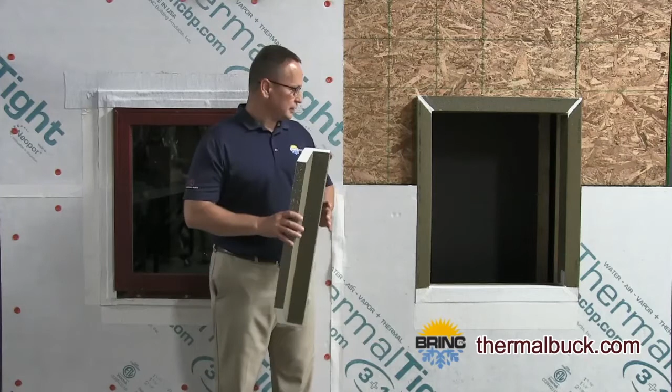The first product I'd like to talk to you about today is Thermal Buck. Thermal Buck is a mounting system for windows and doors when you use continuous insulation. Thermal Buck moves that mounting point away from your wall, so you have a flush plane to attach your cladding. Thermal Buck comes in 7 different sizes to match what you're doing on the outside of your wall. The different thicknesses of insulation, whether you're going to use a rain screen, whatever you're after, we have the solution for what you need to do.

Thermal Buck simplifies this process. Typically a wood buck is used, and there's a lot of inefficiencies with a wood buck. A wood buck has thermal bridging, it's very hard to seal out moisture and water, and Thermal Buck does a great job of solving all of these issues.

Thermal Buck also has an integral slope to it. It starts at 1 3/4 inches and goes to the outside edge. All the pieces have it so that your entire new rough opening is waterproof and made to drain to the outside. When you install your windows, you seal the back side of that for your water and air seal. Then anytime that window could possibly leak, it runs down the cavity and out to the outer face of your water barrier.

Now that we've talked about Thermal Buck and how it will work with any type of continuous insulation, I'd like to talk to you about Thermal Tight, which is our panel system that we designed to manage the four control layers of your wall system, which are bulk water, air infiltration, thermal performance, and vapor drive.

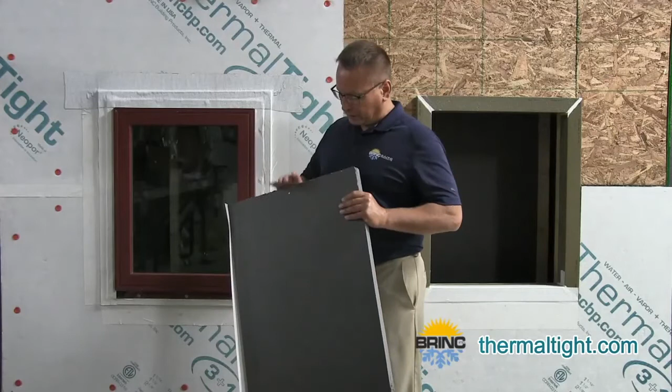So what we started out with is an insulation called Neopor. It's a graphite-enhanced EPS by BASF, with an R-4.7 per inch at 75 degrees. That's a stable R-value because it doesn't use any blowing agents—it uses graphite to enhance that R-value, and that R-value actually increases as temperatures decrease.

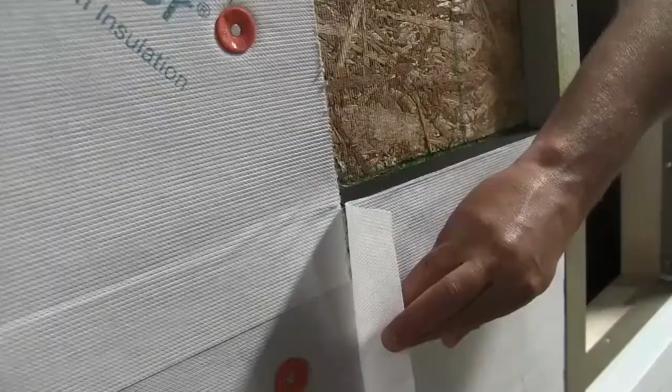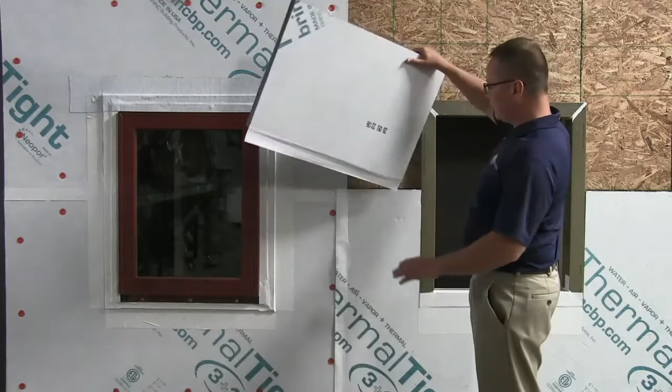We laminate a high-performance weather-resistant barrier to the base Neopor panel. The WRB is larger than the panel below it, creating a flap system. The reason for that flap system is to tie the whole wall system together so you can manage your bulk water and air on the outside surface. We adhere these flaps with double-sided tape. You first do a sideways flap, then when you come back with your next row, you have a top-over-bottom flap, so any water coming down your wall never has a reverse flap to get into the wall system. Once everything is sealed up, we install the windows and flash them with our own tapes, so you have one supplier to give you all the answers for your exterior wall system.

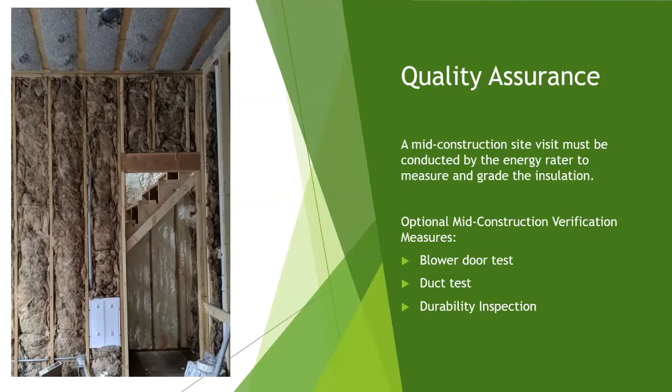There's also optional testing that can be done: mid-construction blower door, mid-construction duct test, which we really do recommend because it gives you an understanding of how the home is performing and the air sealing measures you're doing. You can see how that is stacking up at an early stage and address issues early on, prior to drywall being installed. So talk to your rater and your project team about getting that done. That is a definite helpful test to have completed.

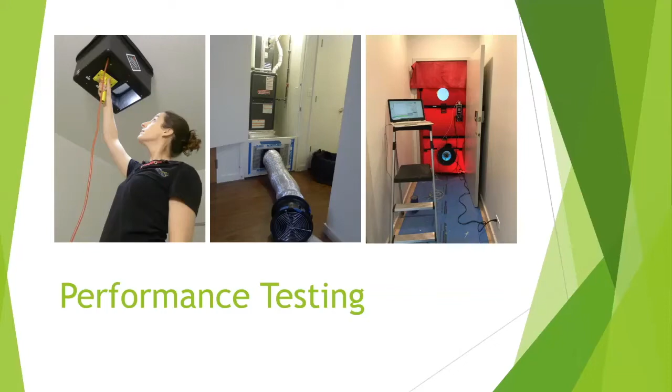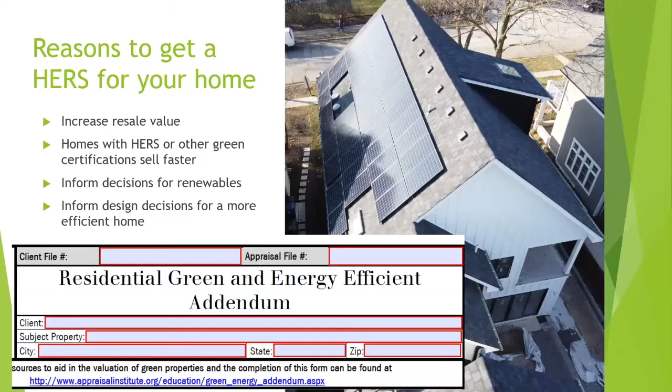It's a great way to measure and assess the performance, and it allows you to make decisions for renewables if you're sizing systems, and it really helps out with the real estate aspect. So that's the HERS idea in a nutshell, and we're going to find out from all of the members today what their HERS score was. So now you have a better understanding, and Katie, I'll give it to you.

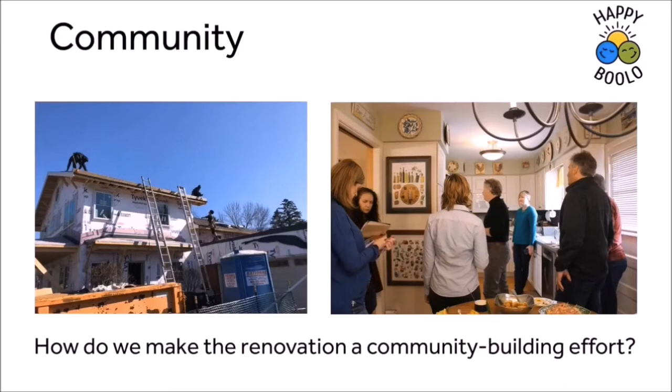Here we're pursuing three opportunities related to community. The first: how do we create a living space that really works to bring people together and operates as a cozy retreat for the two of us? Secondly, how do we challenge this stereotypical experience that house project equals headache, and instead have the process build community? Third, how do we renovate the home to fit into our Drury Lane neighborhood?

Once we decided to stay, functionality had to become the next pillar of our philosophy. Here we're dealing with a 1964 rather constrained split-level floor plan, the type you find all over the Chicagoland area and in many other U.S. suburban areas. So the question is, how do we transform this into a renovated structure that supports living what we love and fosters healthy habits? For us, functionality includes principles such as design for ease of movement and built-in resiliency.

Our third pillar, sustainability. We had already invested so much in our landscape over the years, migrating from more conventional beds to natural gardening practices grounded in the field of permaculture. So here we ask, how can we extend what we're already doing to the full footprint of the home and further enhance our outdoor practices? We are very grateful to be on track to be the first LEED home in Arlington Heights, and one of just a few LEED Platinum remodeled homes in the Chicago area.

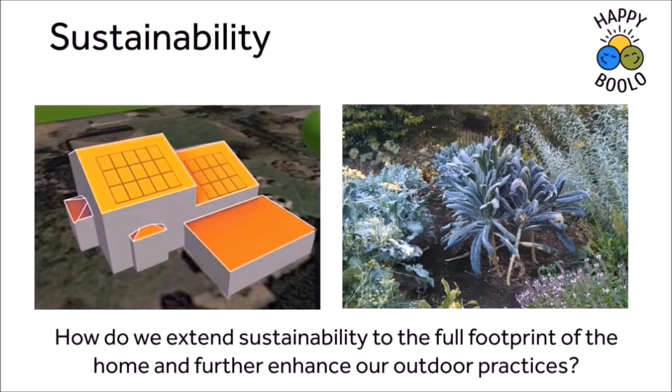We are thrilled to have such a wonderful community of experts working on the project, some of whom will walk you through how we are bringing our philosophy to life in our Happy Boolo home. I'm pleased to turn it over to Mike Coleman, our architect general contractor, the man of many hats on this project.

I'm Mike Coleman. I'm a licensed architect and owner of Smart House, a design-build company specializing in high-performance, sustainable, healthy homes. I'd like to share with you a project that we've been working on for the last year or so, affectionately called Happy Boolo. The challenge was to take a typical 1960s split-level suburban house and convert it into a LEED Platinum and net zero energy home.

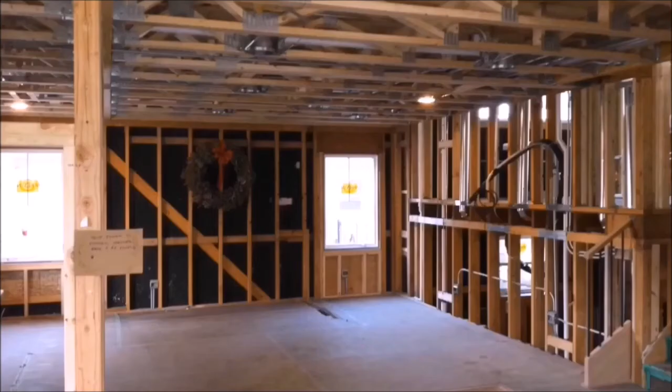How do we do it? Our approach was to try and reuse as much of the existing home as we could and design something complementary to the neighborhood, and do that all based on using the best science and technology available today.

Mike and Amy were very interested to try and capture as much energy and water on site to be used to power their home, as well as provide food source via site-harvested food. The site and orientation of the home provided opportunities to take advantage of solar energy in a number of ways. Here's Lisa Albrecht to talk a little bit more about the solar system design.

My name is Lisa Albrecht and I own Albrecht Solar. I've been in the solar industry here in Illinois since 2007, and I also serve on the board of directors for the Illinois Solar Energy Association. The project is going to have 27 solar panels, which should provide about 110% of their annual load pre-construction. Because Mike and Amy had already lived in this house, we knew what their electric usage was in the past.

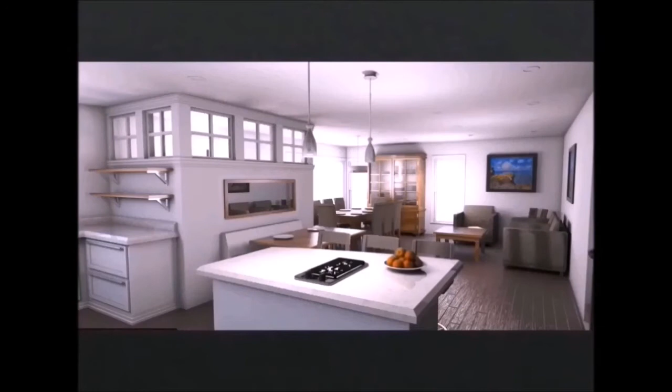One of the main drivers for this project was a desire to increase the functionality of the home in a number of areas. First, Mike and Amy wanted to make it even easier and more inviting to share moments of breaking bread. For this, the focus was on expanding the kitchen and providing flexibility to allow for various size gatherings.

One of the features we incorporated into the design is this light shaft thermal chimney. With a skylight located on the roof, light filters down through the main stairway in the house all the way down to the lower level. The skylight can be opened, allowing natural ventilation to be drawn up through the cooler air in the lower level.

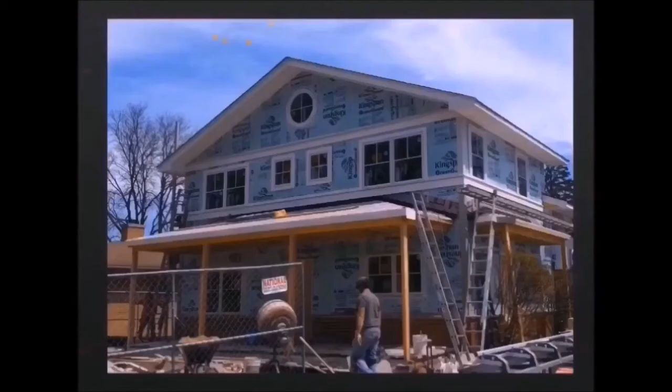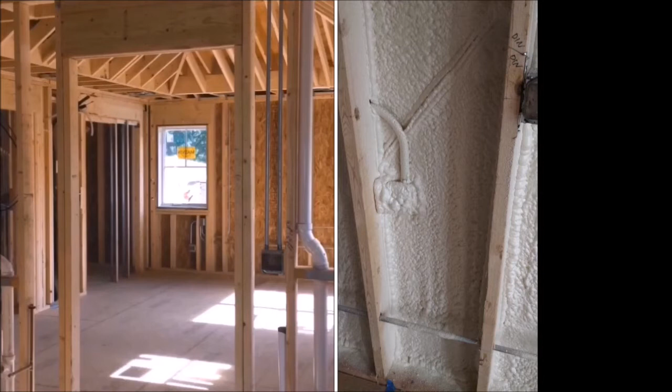The entire exterior of the home was wrapped in 1.5 inches of rigid insulation. The existing interior walls were salvaged and reused as much as possible. The exterior walls were sprayed with 1 inch of closed cell foam as an air sealer. Batts were applied over that, then drywall. The roof and attic space were insulated to R65 with a combination of batt and blow-in insulation, and the walls achieved about an R34. The exterior of the home is designed to respect the scale and character of the original architecture.

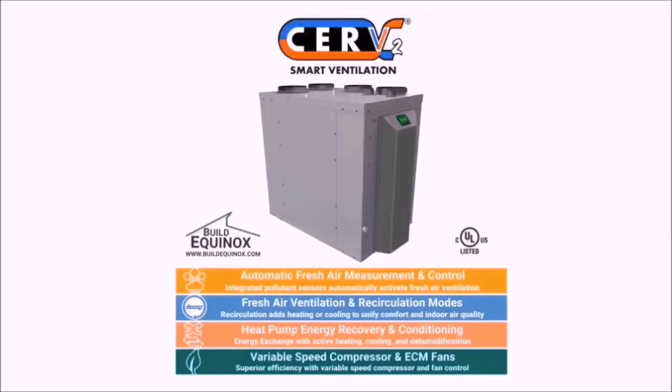To optimize indoor air quality and comfort, we chose a conditioned energy recovery ventilation system, or CERV.

Hello, I'm Ben Newell, president of Build Equinox. Welcome to our net zero facility located in Urbana, Illinois. This is where we design and manufacture the CERV smart ventilation system.

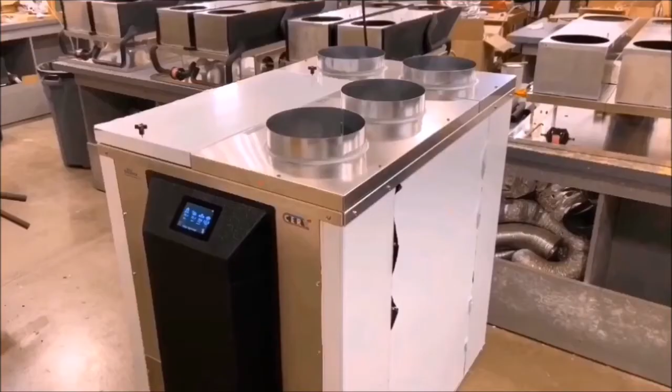Unlike traditional ERVs, the CERV uses a small heat pump for energy recovery. This allows us to actively heat or cool and dehumidify the fresh air as it's brought into the house. The CERV is a smart system because it uses actual air quality data to make decisions on ventilating the home. It measures indoor and outdoor temperature and relative humidity levels, along with indoor CO2 and VOC levels. This ensures excellent air quality and saves a lot of energy.

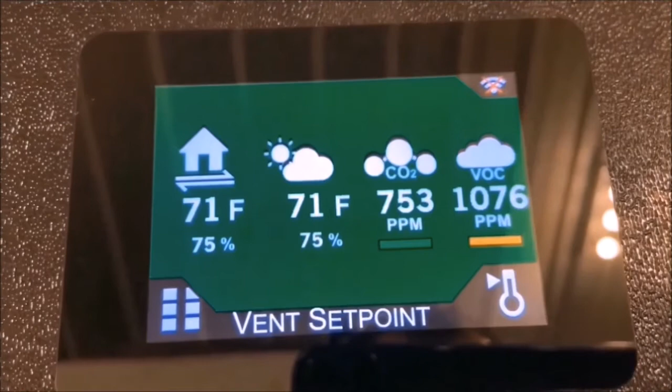Coupled with the CERV, we are utilizing Mitsubishi electric mini split heat pumps located strategically throughout the home. The mini split heat pumps provide the heating and cooling energy. The CERV distributes the air evenly throughout the home, and the whole system working together is a very energy efficient electric solution to all the heating and cooling needs of the home.

Selecting sustainable and energy efficient fixtures and finishes is also a priority.

Here's Carrie to talk a little bit about the interior design process. Hi, I'm Carrie, design coordinator at Giuliano Design. Together with principal and owner Julie, we are designing and curating the Happy Boolo interior spaces.

Interior design is more than beautiful fabrics and fixtures. A truly well-designed space functionally supports the behavioral habits of the homeowner. An added and unique aspect of the Happy Boolo design process has been the careful and deliberate consideration around the sustainability of the products and materials selected to complete the needed functionality and the desired aesthetic.

Thanks, Carrie. Now here's Mike Baker to take us a little bit deeper into the landscape design. Thanks, Mike. Amy and I are really excited about our landscape vision because it was the catalyst that inspired the whole project from the start, and has actually evolved to manifest all three facets of our philosophy.

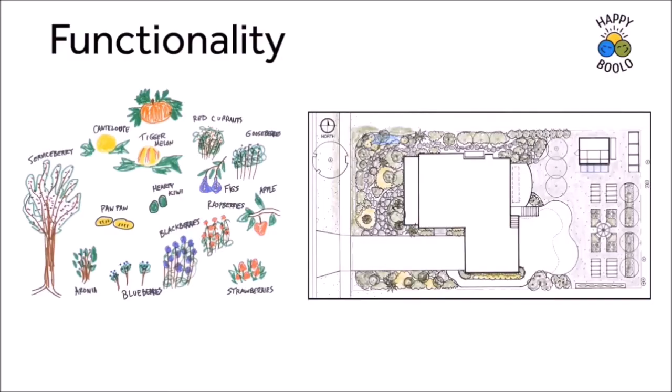Our landscape will work for us in that it's predominantly edible, and we will be expanding the diversity of herbs, vegetables, and fruits we have historically grown by adding select nut-bearing trees. The plants we choose will also be functional, whether that's comfrey used for chop and drop fertilizer or willow and hazel used for building raised bed fencing, compost bins, and plant supports.

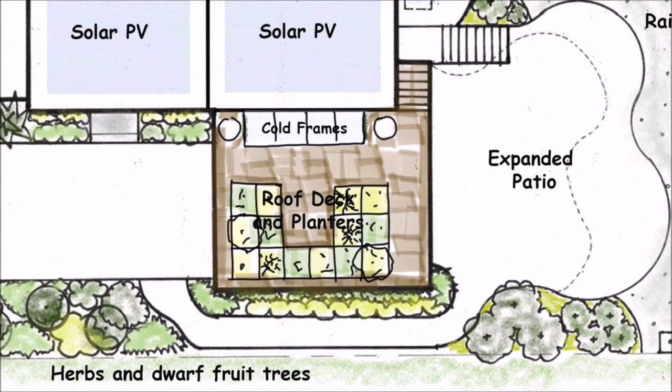Our garage wall will provide a sunny microclimate for herbs and espaliered fruit trees, while the sun-drenched garage roof will protect other plants from rabbits. Our cold frames, raised beds, and greenhouse will extend our growing season, while the vertical structures we use in the beds and elsewhere will optimize our limited horizontal space.

The architecture of the house itself will provide the function of capturing rainwater from the roof and garage terrace and then directing it to catchment areas in different parts of the landscape.

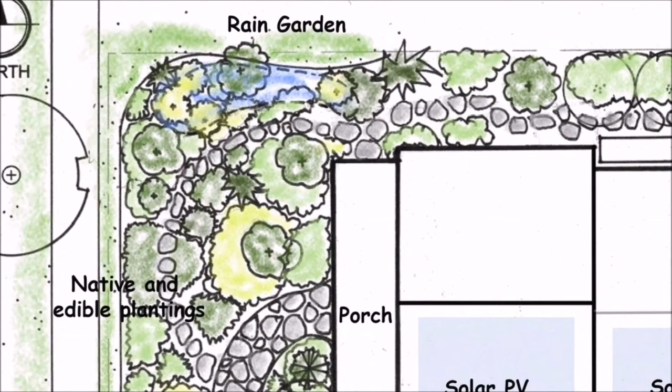It's also important to us that any landscape be pleasing to the eye, so the plants, shrubs, and trees we choose will also provide aesthetic appeal, while their supporting structural elements will keep the landscape tidy and organized. And we also look forward to sharing our landscape's productivity with our community. We hope our landscape can be a living classroom to show what a regenerative outdoor environment looks like, along with the techniques that allow you to create such a beautiful and productive retreat.

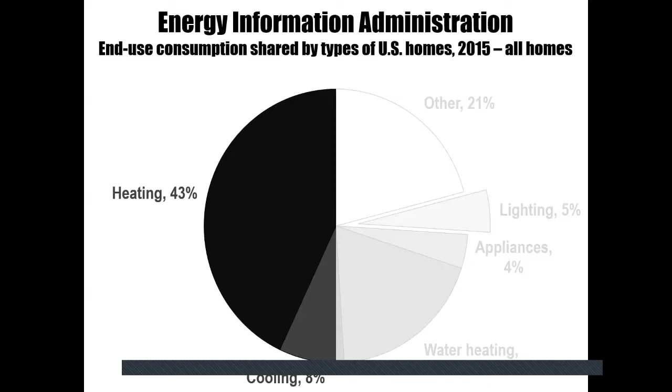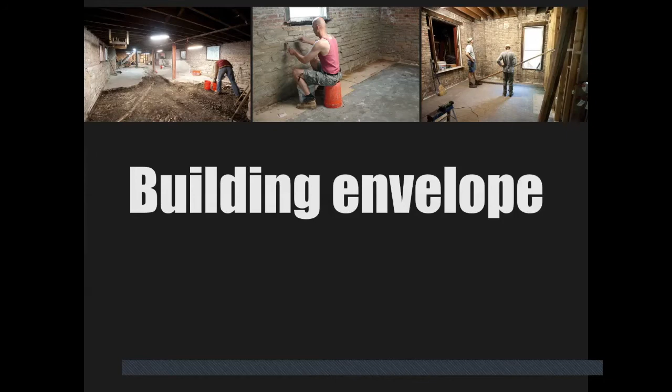To make a significant dent in space conditioning, we need to improve the entire building envelope, which includes several aspects, such as the building slab, the foundation wall, the exterior walls, doors and windows, all sorts of other holes in the walls, the attic, and the roof, of course. The improvements to the building envelope we are talking about are basically insulation and air sealing. In other words, thermal improvements to the building envelope and eliminating air drafts, which also will make for a much more comfortable home.

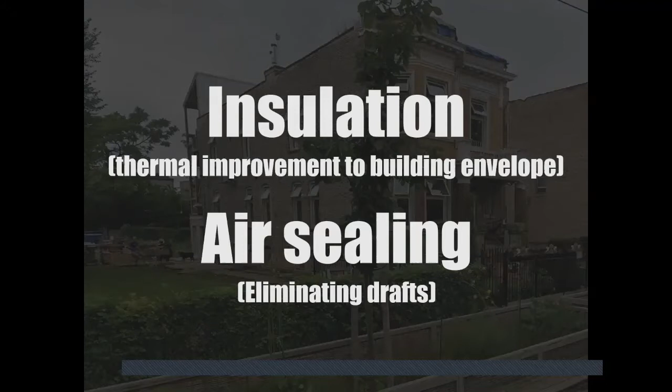Let me give you a baseline from the early days of our project. One easily quantifiable metric of building is air tightness, thanks to the blower door test that Lindsay mentioned at the beginning of this webinar. The blower door test at the beginning of our project yielded almost 5,000 cubic feet per minute at 50 Pascal depressurization of the home.

With the help of Timothy Hepner, we figured out that the cumulative area of air leaks would add up to a hole in the wall, or an open window, measuring 22 by 22 inches. And that window is open year round, no matter how hot or cold. So think about the polar vortex - you're trying to keep your house warm, but you have that window you can't close. That's sort of what was going on there.

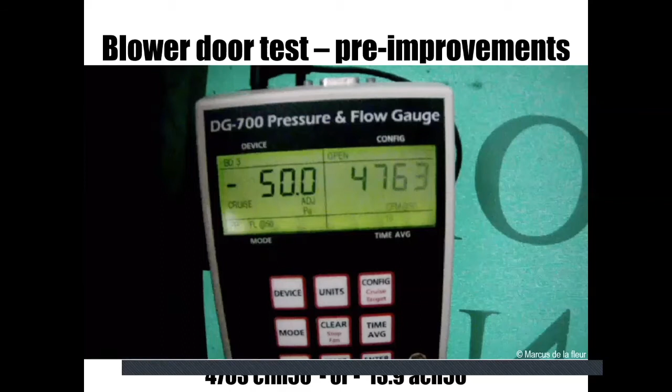Let me ignore for a moment all the deferred maintenance items on our 100-plus-year-old home that we had to uncover and fix. In order to tighten up and insulate the building envelope, we had to find all real and potential air leaks.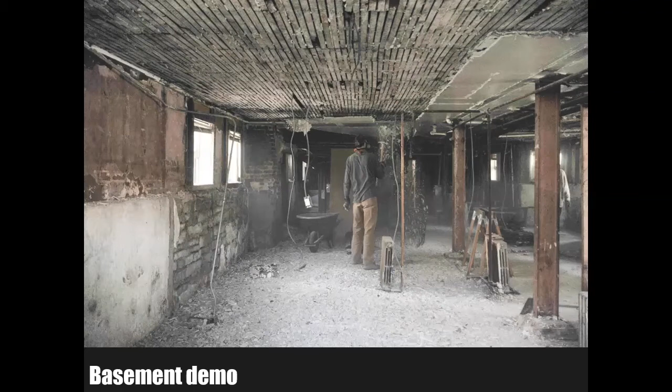Which basically means cutting the building down to the masonry walls and studs and starting over. In that process, we salvaged as much material as possible. We had a construction waste management plan, and what we couldn't salvage was sorted for recycling, which left us only with a small amount of debris that went to the landfill, such as the old plaster.

Back to the building envelope improvements, we used what's called a flash and batt strategy tailored to our building. We started off with an uninterrupted layer of closed-cell foam across all exterior walls for air sealing, followed by a layer of open cell foam and rock wool, which yielded an insulation value, or R value, between 28 and 40.

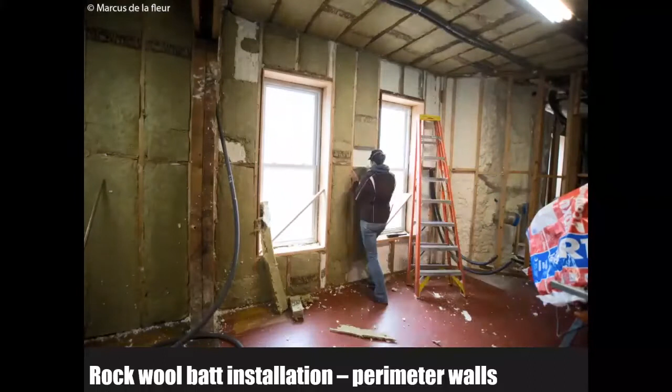I highly recommend tailoring any air sealing and insulation strategies to the specifics of your building and your energy goals, as every building is really different, in particular existing and older buildings.

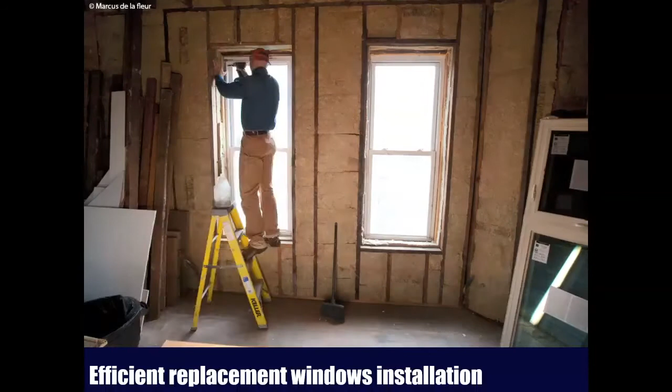Now that takes care of the walls, except that we still have those pesky holes that are left. Some people call them windows. This is a tricky subject, as it is hard to make money back on expensive and high-performing windows.

Here are a couple of aspects that I can share. Whatever window you pick, it should somewhat correspond to your insulation assembly. In other words, there's no point having really good insulated walls and then lousy windows, or the other way around - really high-performing windows but insulation in your walls that could really be better.

In this day and age, there's really no reason to pick a window that has a U factor greater than 0.2. These well-insulated windows are now widely available for a very reasonable price.

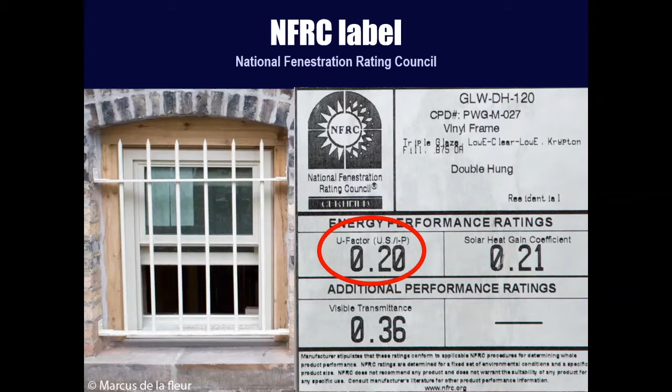Also, the more moving parts on the window, the greater the potential for air leakage, which brings me to this blank field on this NFRC label. What should be listed here is the air leakage for this window. If it isn't listed, make sure to ask what the air leakage rating is.

Even though Energy Star requires an air leakage value of equal or less than 0.3 cubic feet per minute per square foot area of window, that 0.3 value would be a rather drafty and uncomfortable window. So I definitely recommend that for a comfortable, somewhat airtight window, one would need to drop that value by an order of magnitude to something closer to 0.03.

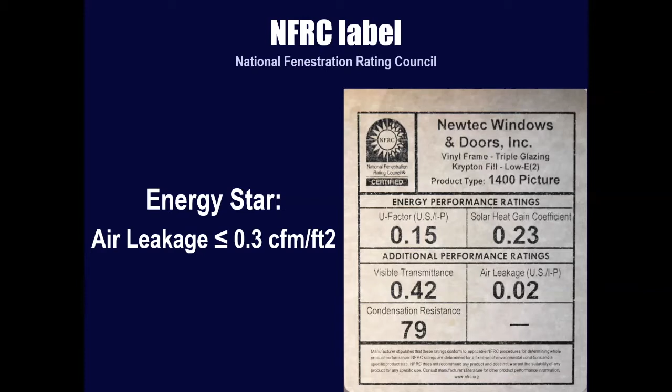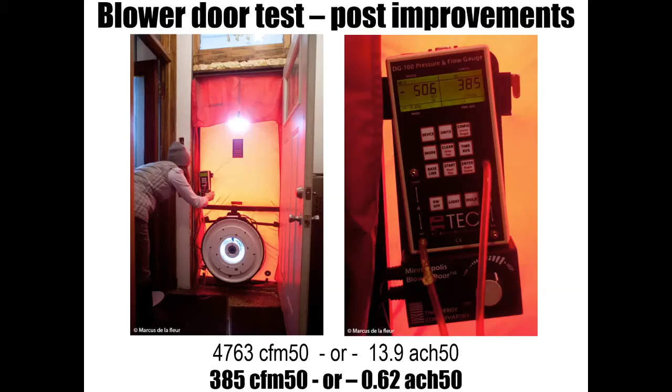Now that we have tightened up the building envelope, it's time to get the blower test running again, and our results dropped from the previous 5,000 cubic feet per minute at 50 Pascal down to 400 cubic feet per minute. Or, using the hole in the wall analogy again, we went from a 22 by 22 inch hole in the wall down to a 6.5 by 6.5 inch hole in the wall. Now that is one big problem solved.

Problem is, another one is created. With natural ventilation basically eliminated and no longer flushing out pollutants, we now have to address indoor air quality - in other words, how to prevent the indoors from feeling smelly and stale after a few hours or days.

And depending on what you feed these guys, it can get smelly within minutes. Maybe that's TMI.

However, moving on, to provide healthy and energy efficient levels of fresh air supply, we employed an ERV for each unit in the building, which is basically a ventilation unit with a built-in heat exchanger.

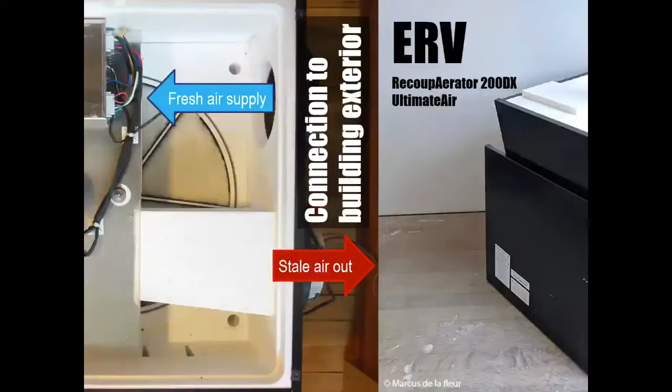The ERV has one side that connects to the exterior of the building, and if we flip it around to the other side, we see the side that connects to the interior of the building. In between, we have an enthalpy wheel that sits between the two sides, which you can see partially in the background. That enthalpy wheel transfers sensible and latent energy between the air streams - in other words, it transfers thermal energy and moisture content.

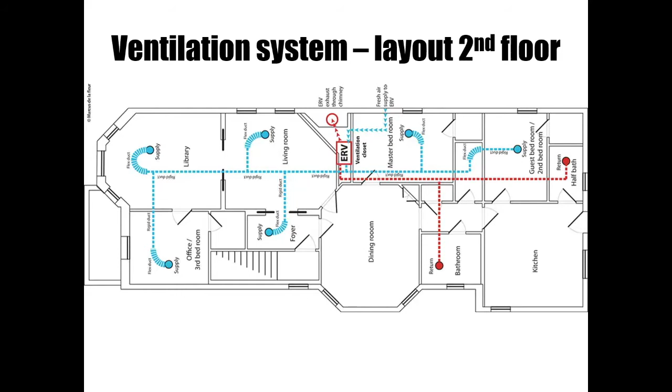I have to say, I really love this gadget. I love the ERV, particularly in the wintertime. It's like having a window open all the time to get fresh air in, but it doesn't get cold. I absolutely love it.

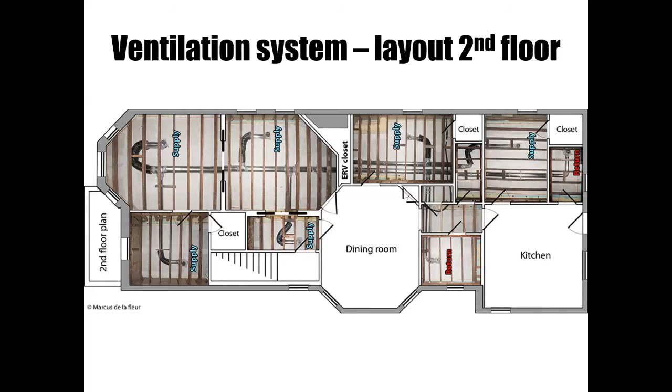With the peak heating load on our project estimated and reduced, including domestic hot water, reduced to 37,500 BTU, we were able to install a small hydronic heating system with an indirect fired domestic hot water storage tank.

The air tightness in combination with the insulation strategy does show in the energy consumption when we look at the space heating, where we recorded an 80% reduction in 2016.

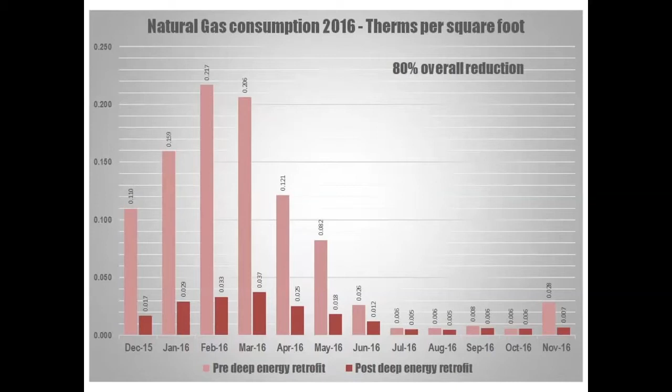Since then, this primary heating system has been demoted to a backup heating system with the installation of our all-electric mini splits or air source heat pumps, which provide us with the needed winter heating and summer cooling and dehumidification.

With a significant reduction in the overall electricity demand, we were able to add a grid-tied photovoltaic system, or photovoltaic array, also by Lisa Albrecht, that basically powers all our electrical needs, including the mini splits, including the heating and cooling.

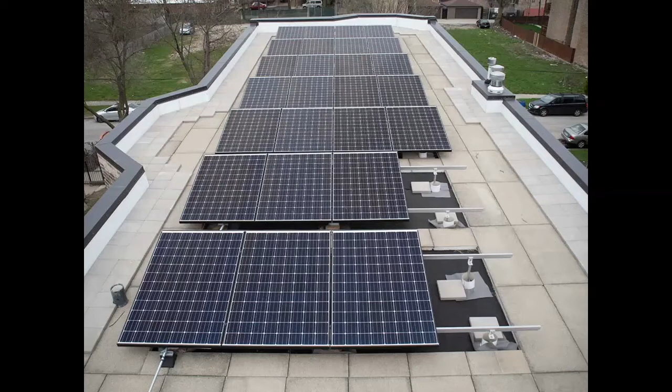This last step was the one that puts net zero energy within our reach. But what we have to remember is it only did so because of the building envelope improvements, the air tightness, and the overall energy reduction. All these had to come first.

To conclude, we reached our goal of a healthy and very comfortable home that is affordable to run, operate, and maintain. And of course, there are many aspects, small and big, that are not mentioned here, such as our community or a sustainable landscape that is still in the making. But maybe I'll get a chance to talk about those aspects at next year's Green Building Home Tour. That is all from us, and thank you so much, everybody.

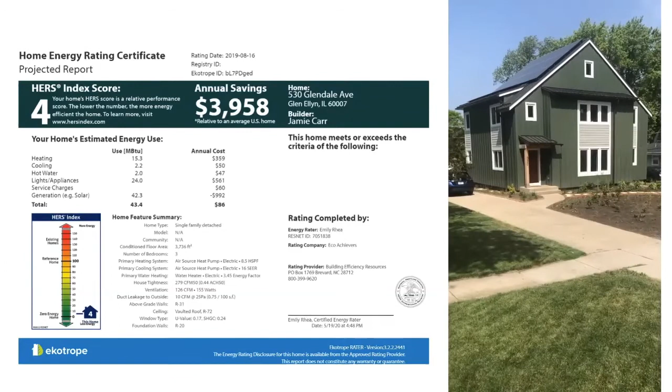The HERS report shows an estimated annual utility cost of $86. The 10 kilowatt, 31-panel solar array, designed and installed by Lisa Albrecht at Albright Solar, provides almost all of the house's power. Tom Bassett-Dilley and another architect in his office, Denny Burke, were the architects for this project. They are excellent with high-performance building concepts and details. They did a great job making this house work on the existing foundation, which can be really tricky.

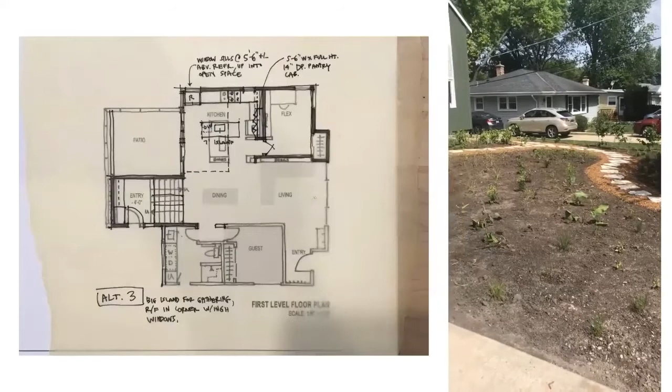Here we're seeing mostly native landscaping that just went in last week. I took a sabbatical from EcoAchievers and acted as the general contractor on this job. During demo, we separated all of the metal so it could be recycled.

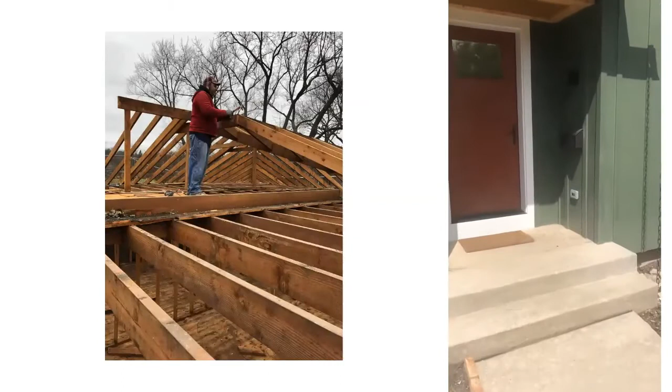We did the same with the brick from the chimney, which you see being used here as edging to divert water away from the house. My helper and I also took down the roof piece by piece and saved it to be reclaimed in the house. Before we started framing the house, it looked like this.

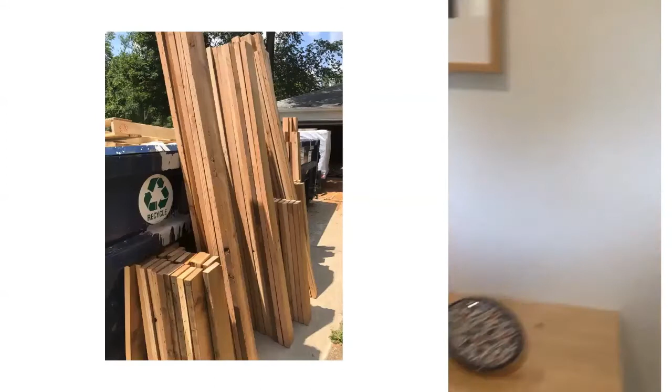I planed down all of the wood rafters and ceiling joists, and they became the built-ins you see here and throughout the house. Kids use this area as a drop zone for their various projects. One of the visual aspects of the reclaimed wood that I really like is how you can see all of the nail holes.

While the video walks us through the house, I want to talk about what I see as 4 keys to green building in our climate: a good envelope, good indoor air quality, conscientiousness about water quality and use, and good mechanicals. First, let me orient you a little bit.

We just walked through the living room, dining room. This is the kitchen. Not all of the cabinet fronts are on yet. Kitchen then connects out onto the screened-in porch. The porch faces west and provides shade to the kitchen in the afternoon, but also allows a view from the house out into the park beyond.

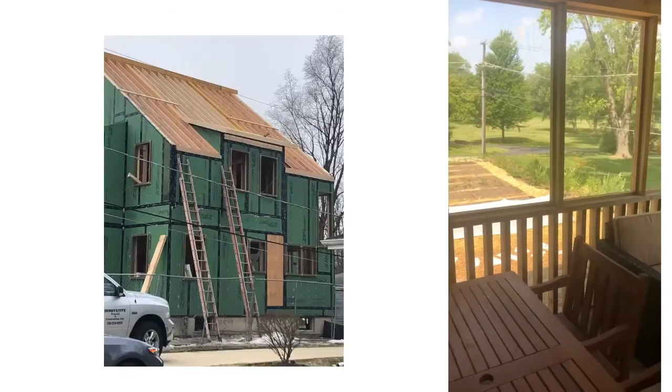By a good envelope, I mean a well-insulated, thermally bridge-free walls, an airtight building assembly, really good windows. In the video, you can see the windows here in a moment, which are Alpen, European-style tilt-turn windows. In the picture on the left, if you look carefully, you can see thermal bucks around the windows. Thermal bucks consist of rigid insulation encased in a polymer coating which surround the rough opening.

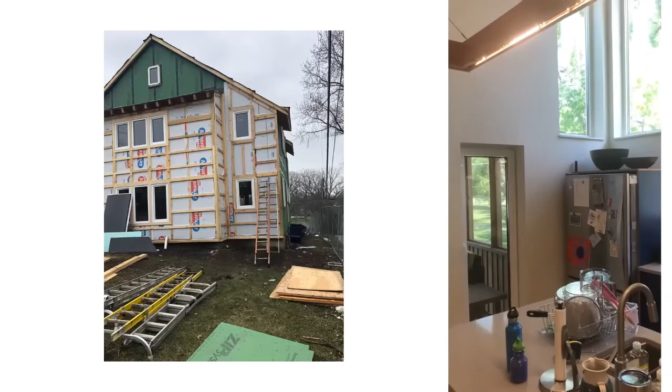The exterior insulation, something I believe is really important for all high-performance homes, comes up to meet these thermal bucks, providing a completely thermally bridge-free assembly.

One of the things I love about the house are these high windows and this open to above space in the kitchen. I think Tom and Danny also did a great job designing this apparatus on the ceiling that connects the dining room and the kitchen and provides a home for the task lighting above the island.

As we go into Sarah's office and then the guest room / away room and the downstairs bathroom, I want to talk a little bit about indoor air quality.

Indoor air quality, like air sealing, is one of those things it's hard to get right because so many different trades are involved, and it requires constant and meticulous oversight from the general contractor.

In this job, I bought every sealant, every glue, every paint, every finish, and checked each one to make sure it was third-party certified for indoor air quality. Ensuring good indoor air quality can quickly get complex, but looking for the GREENGUARD label is a good start in vetting products for indoor air quality.

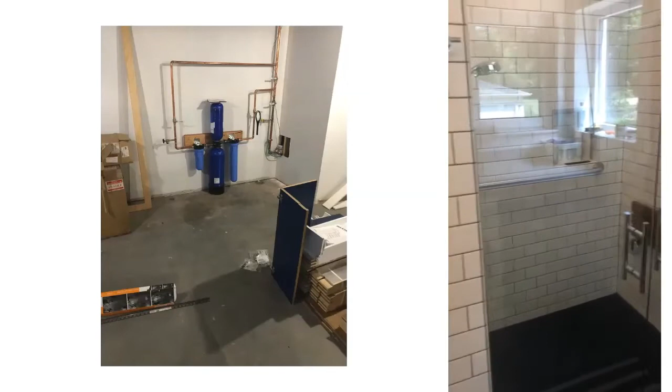And in the basement, we have a whole house water filtration system, which you see at the left, that ensures high quality, healthy water throughout the house.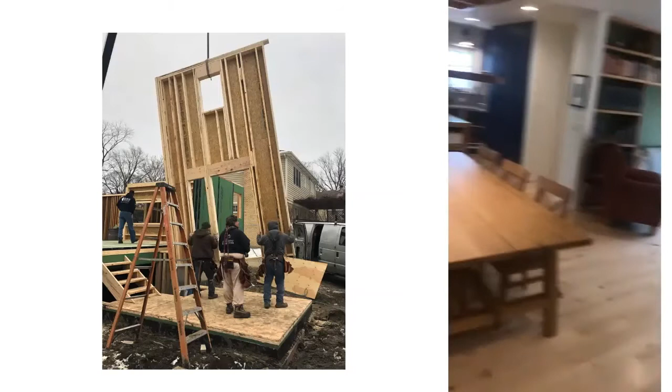As we walk upstairs, I'll show a few quick shots of the construction of the stair and talk a bit about our decision to build up rather than out. Mostly we did this because it was less expensive, but as an added bonus, we preserved the large backyard that opens onto the park.

Adding the stair was the only modification to the existing 1,000 square foot footprint of the house. Upstairs, there are 3 bedrooms, my office, which is beyond the transom windows you see there, and a bathroom clustered around this central open area.

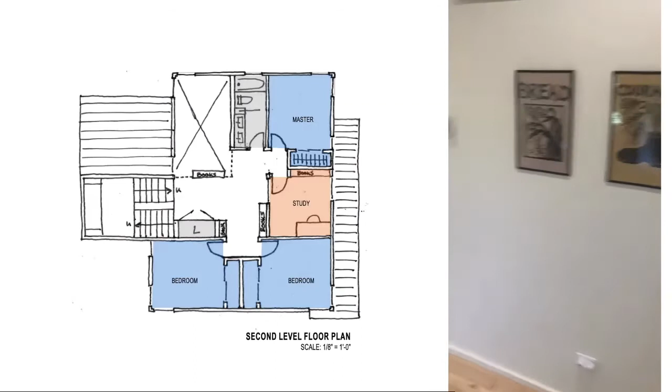The central open area is another one of my favorite spots. I love the light that the high windows bring in, and the sense of openness provided by the cathedral ceiling. Working with Tom and Denny, we made the very conscious choice to keep the bedrooms small and have just 1 bathroom upstairs, so we could make the most of this space.

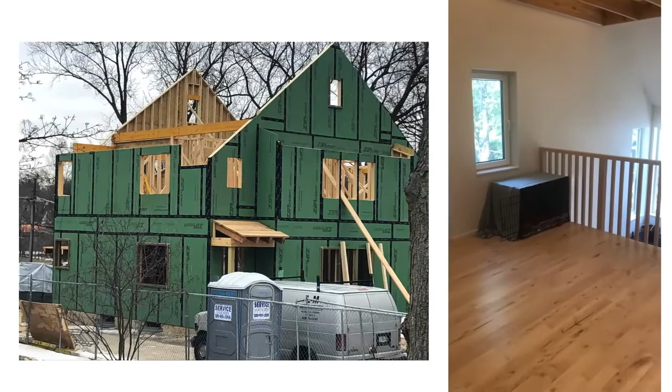Our goal was to create spaces, including this one, that got used and enjoyed every day. Framing the house this way was extremely difficult, but it presented the opportunity to create significant architectural interest.

I'm a big believer that what makes things beautiful and what makes things sustainable doesn't happen on the surface, because that's not what creates comfort. Comfort happens because of quality design and execution. I believe that creating a house that's beautiful and highly functional is just as important to sustainability as energy efficiency or indoor air quality, because it means the house will be used and cared for long into the future.

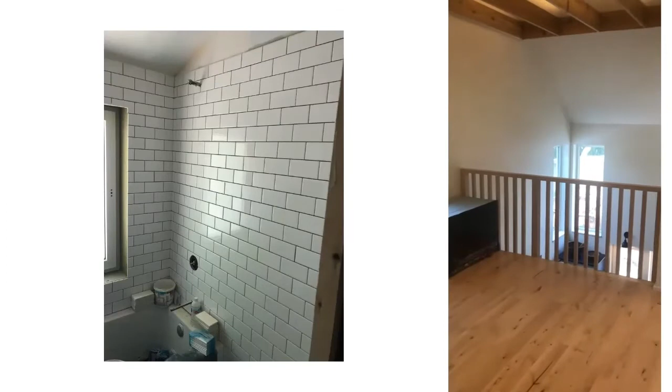So we walk into the bathroom here in a moment. I'll mention one other green feature of the house that marries design and sustainability to create comfort.

When someone walks into the bathroom, a motion sensor turns on a very efficient pump that feeds hot water to all the piping. When you turn on the faucet or shower, you get hot water right away. This both saves water and energy, which promotes efficiency.

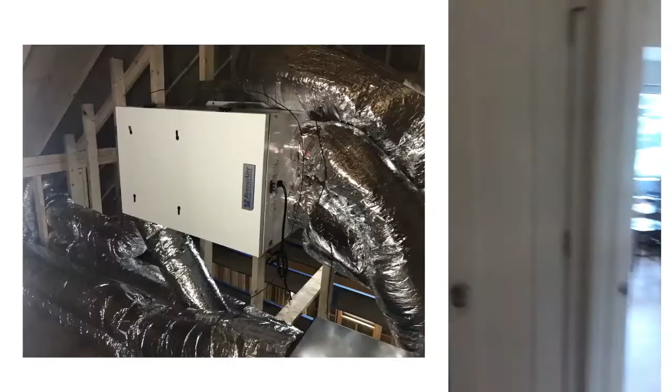And also is much more comfortable because you never have to stand waiting for water. We're now going to tour the master bedroom, then my office and the kids' bedroom, and then we'll head down to the basement. As we're doing this, I'm going to take a few minutes to talk about the house's mechanical system.

The house's mechanical system is key to all of what we've discussed so far, including especially comfort, energy efficiency, and indoor air quality. Because the house is so tight, it needs a source of fresh air.

So this unit on the left, located immediately above where I'm standing now, a RenewAire EV200, provides continuous fresh air to the house. The supply air is provided high on the wall in this central open area, so it can fully mix with room air before coming in contact with people.

ERVs use very little energy to supply ventilation air, recover energy from room temperature before it's exhausted, and significantly improve indoor air quality.

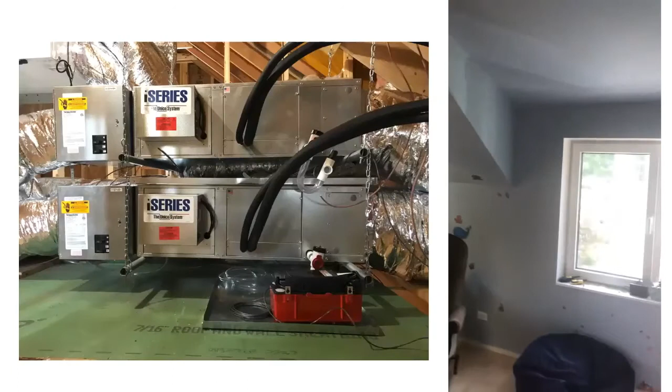The unit on the right, in the previous slide, is a Unico I-Series cold climate air-to-air source heat pump. It provides the remainder of the heat the house needs, as well as cooling in the summer. There is no gas line to the house anymore, and no gas used anywhere in the house.

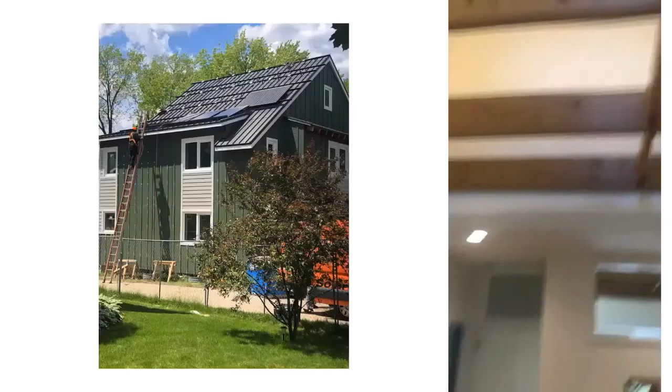Here, you can see the high supply for the ERV I mentioned earlier. Not having combustion in the house not only improves indoor air quality, but it means the house can be powered entirely by renewable sources. Metal roofs are a great fit for solar because the racking can clip right onto the standing seams, so there's just one penetration through the roof for power.

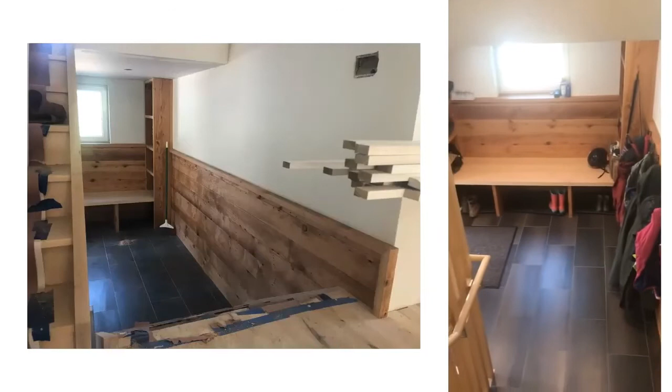As we go down to the basement, we're passing through the back entry of the house, which is at grade and features the same reclaimed wood, shelving and paneling we saw earlier by the front entrance. I think Tom and Denny did a great job here as well, making this space both really functional and beautiful.

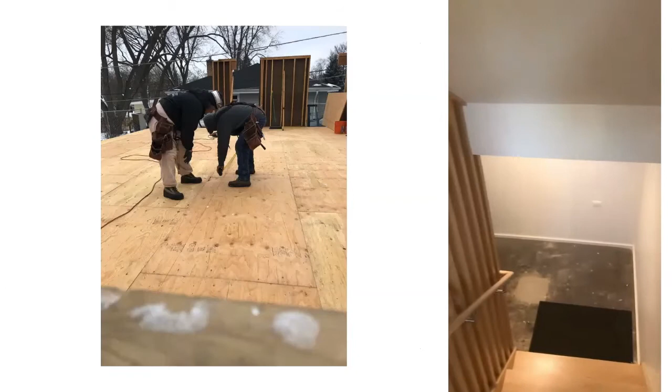In the basement, there are several things I'd like to point out. The first is how we saved all of the existing first floor joists and subflooring. They were all in good shape, so before we started framing, we put down a new layer of plywood subfloor to stiffen everything up and make sure we started with a square and level base.

Next, I want to show the oversized hot water storage tank, the heat exchanger and pump for the radiant system, and the radiant manifold.

I chose the Sanden system for hot water and radiant floor heating for a few reasons. First, because it's super efficient. Second, because it's a split system heat pump, meaning it captures heat from outside rather than inside. Finally, the Sanden uses CO2 as a refrigerant, which has a global warming potential over 2,000 times less than standard refrigerant.

Finally, I wanted to point out the solar inverter on the wall here. This is the only piece of solar equipment in the house, which makes solar a good fit for both retrofit and new construction applications, especially given current incentives and pricing.

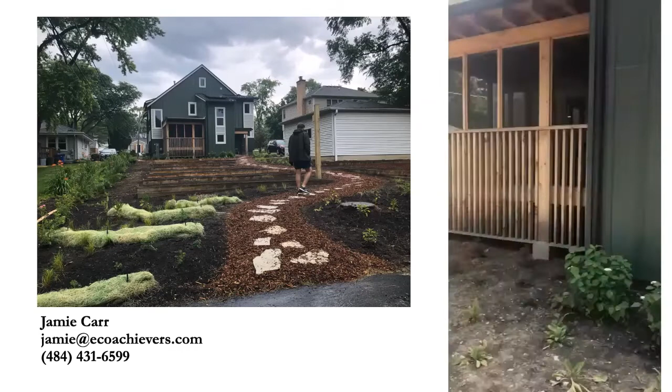In our final few moments as we walk through the backyard, I want to share a few closing thoughts. First, deep energy retrofits can be amazing, but they are not for the faint of heart. They're amazing from a sustainability perspective because they preserve all of the embodied energy of the existing building, but they involve a lot of work and uncertainty.

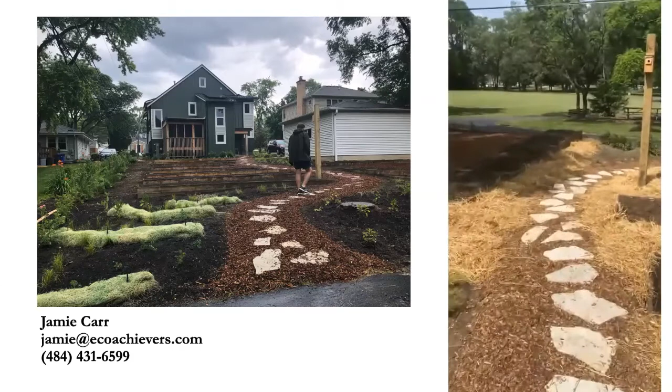Second, if you're thinking about doing something like this yourself, make sure you surround yourself with a good architect and MEP consultant, a good general contractor, and a good third-party green rater. I learned a ton in the process of building this house, including some things I would do differently, and I hope I have the opportunity to share more about some of those lessons learned with some of you.

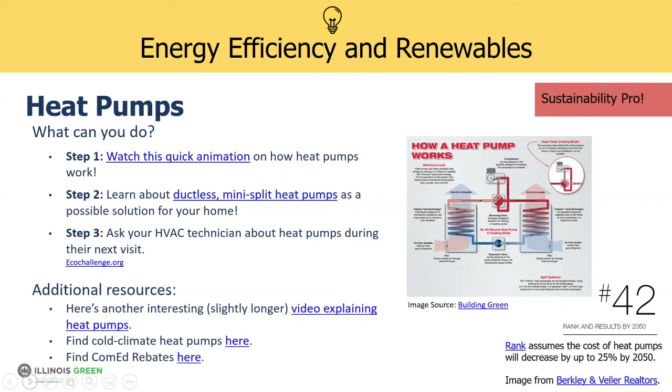So now let's move into water savings. Being honest, when I used to look at sustainability things, since you can't do everything, it was always like, okay, I'm going to focus on energy efficiency and greenhouse gas. Yeah, we should save water, but it wasn't as apparent why. One reason, besides just saving the water itself, is that it takes a lot of energy to process water and transport clean, drinkable water to your home. That same water is used for everything, whether it's the toilet, the sink, your drinking water, the garden - all of those use the same water. So the more water you use, the more energy required to purify and transport water to your home. If we use less, that's a simple savings with a big impact.

Rain barrels - I have a couple friends who actually have these. They sit in their backyard, a big 55-gallon drum, and they're about $45 from the city. They're great for watering your flowers - apparently people say online that flowers prefer that water over hose water. You can also use it for washing the car, washing the dog, basically anything. They have a little spout at the bottom for watering, and they collect the rain with a mesh on top so no bugs get in. They're about $45 from the city, and depending on where you are in Cook County, your water bill is $3 to $10 per 1,000 gallons. So in places like Elk Grove Village, where it's close to $10 per 1,000 gallons, these barrels pay for themselves really quickly.